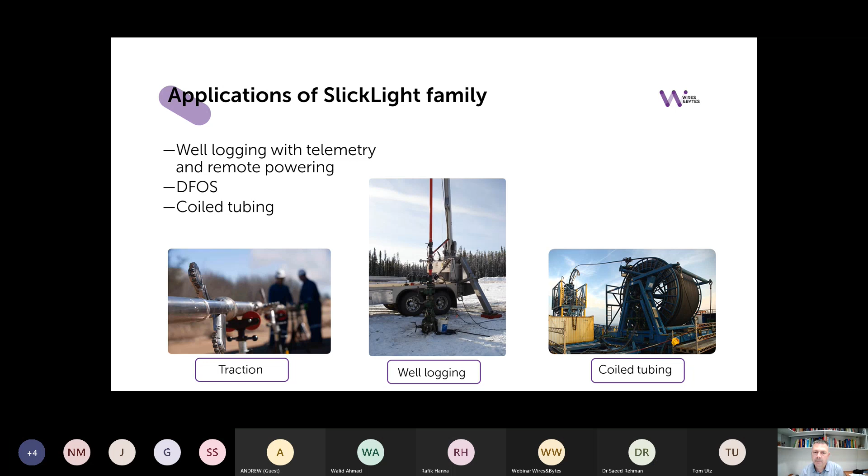What are the expectations of the customer from the slick lines? Actually, it needs to be a very good trade-off between mechanical and electrical features. In other words, it must be strong, it must be small in size, but still it must have very good electrical features. Therefore, it must be a good trade-off between these properties.

Of course, there is a DFOS type which has even more features to be provided in the cable, and that is optical performance. With the combination of DFOS, we have an optical, mechanical, and electrical trade-off, and that's quite a challenge.

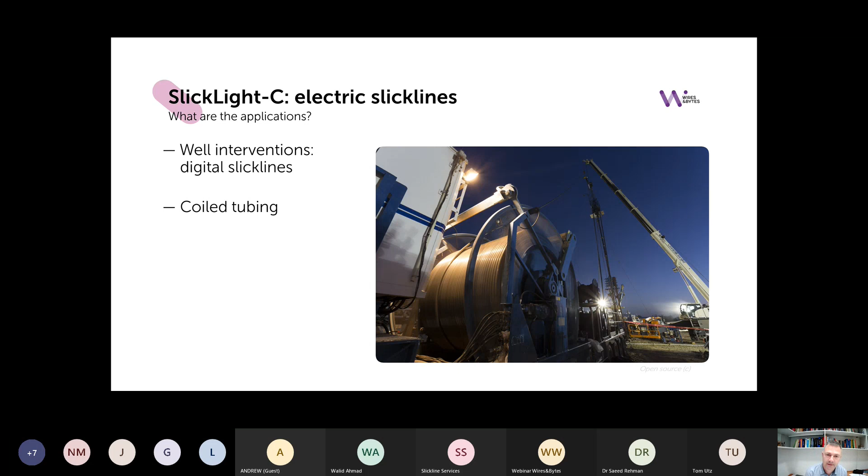Basically, all the SlickLights are strong, flexible, and round. Sizes can go from 3.2 millimeters to 4.8 millimeters. Our objective, or goal, was always to provide good and stable electrical bandwidth in operation, meaning through many well runs up and down, with good bending and twisting properties. We are working hard to lower the resistance in order to provide more power to the tools in such a small size.

Everything with the slick line, especially for the DFOS version, needs to be pressure proofed, so it must sustain 14,000 psi, for example, or even 15,000 psi. So it must be hermetically closed, corrosion resistive, built of corrosion resistive materials. Easy on sealing because you will be mounting the tools and sealing the cables and preventing liquids and gases from penetrating the tools and the cable. And of course, a few customers are already asking for combinations with the DFOS, because they want to evolve from the copper slick lines to DFOS versions.

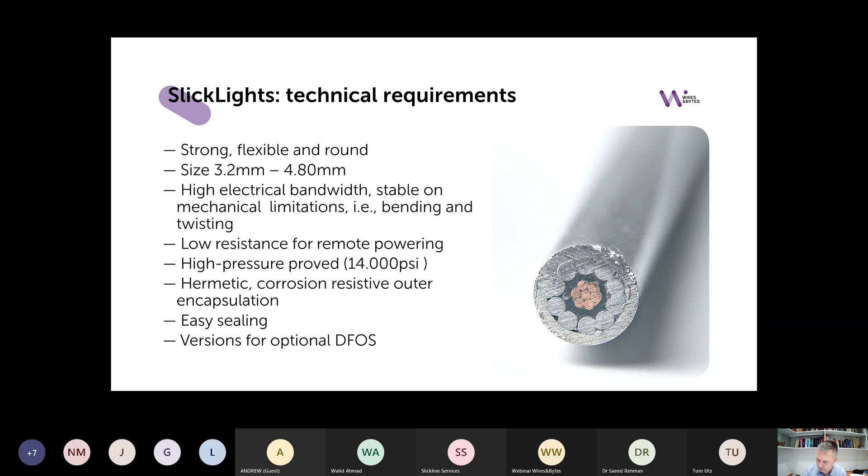This is again capillary tube-based slick lines, and we go actually in two directions with our designs. One is on the left side. It's just a basic version in which we have a copper conductor in the center, insulation, and the outer encapsulation. So the electrical circuit is provided with a central copper conductor and outer encapsulation. That's just the basic version. It's not the strongest, of course. The more advanced version is on the right side, but we can go to very small diameter with this one.

For us, it's simple to produce. Everything sealing-wise is easy, especially now when we are coming with thick wall tubing, using the TIG welding process and not only laser welding, for example. But if you want to go deeper wells and use advanced features like strength, and very soon also advanced electrical properties of the encapsulation, you go with the advanced version, providing more strength. We can do thin layers, multi-layer, or thick layer encapsulation. All of these are possible, with good performance on bending and advanced electrical paths as well.

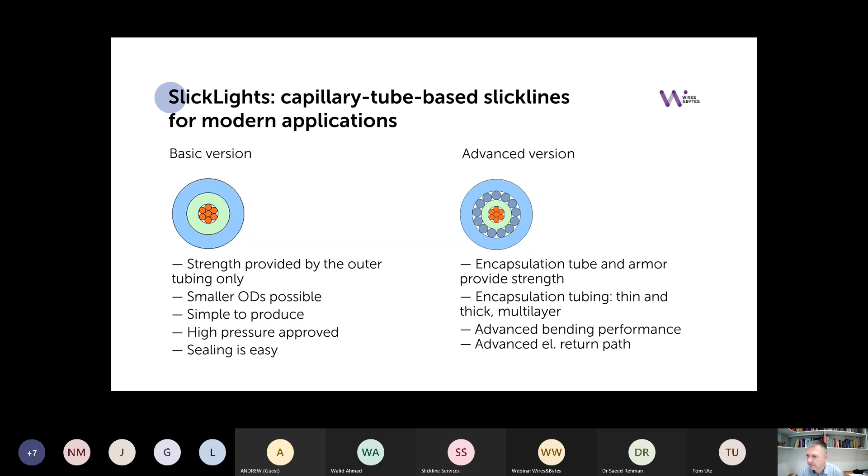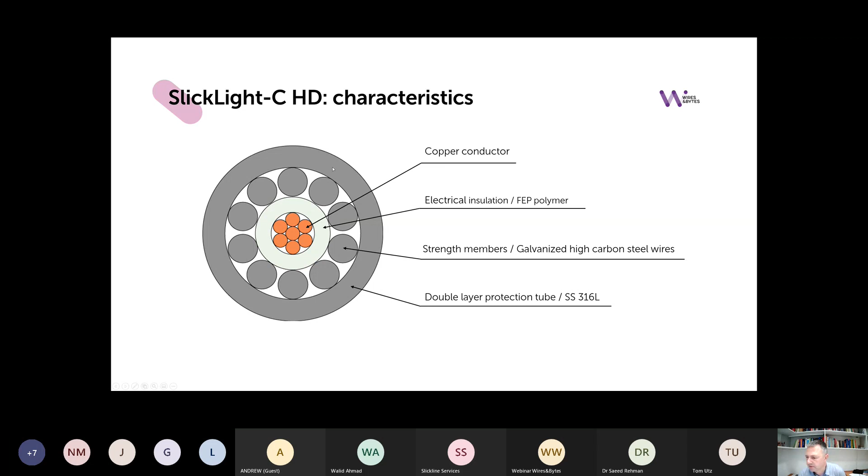We also call the advanced version SlickLight-C HD. HD stands for heavy duty. I'll be giving you some results from the lab on this design, exactly this design which is now on your screen. So we have again the center copper conductor, insulation, the strength members or standing wires, and final encapsulation. And we provide the details - the cable characteristics are always specified in detail in the data sheets which are available.

As you can see, for this design a very important parameter is the rated tensile strength, and it goes up to 15.6 kilonewton, whereas we specify 60% of it as the maximum operating tension - this is a kind of conservative parameter, 9.3 kilonewton. Our estimation, based on calculation, is that the collapse pressure would be 780 bar, but this is only calculation. Actually, it depends on the circularity of the design, and we believe we can go much beyond 1,500 bar in the real experiment, which we haven't done yet.

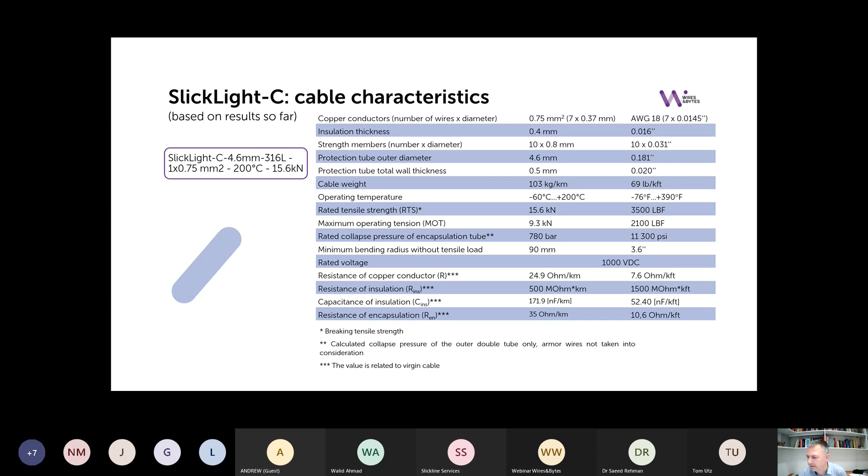And of course, all the electrical parameters you can see here, and we are working very much on these to provide even better electrical performance for future production. The size of this one, which was tested, was 4.6 millimeters with a wall thickness of 0.5. We can soon, very soon, add with the new machine line, even bigger walls - the single layer encapsulation wall will go to 0.8 with the new production line.

So a little bit about the lab measurements and lab activities on our side. We do have mechanical, electrical, and optical equipment in our lab to do all kinds of tests required for the SlickLight. Some of this equipment we developed ourselves, and to our knowledge there is no other equipment of that kind in the world.

In our test facility, we have temperature chambers and strain test benches. We can go to cryo temperatures of minus 200 degrees, all the way up to 300 degrees, in our tests on the cables. On the strain bench, we can go to 50 kilonewtons, and we do the strain evaluation not only with classical strain gauges, but also with fiber optics using very advanced equipment. So we know exactly what is happening with the cables, and also even with the fibers inside the cables. We can characterize all our products in tiny detail.

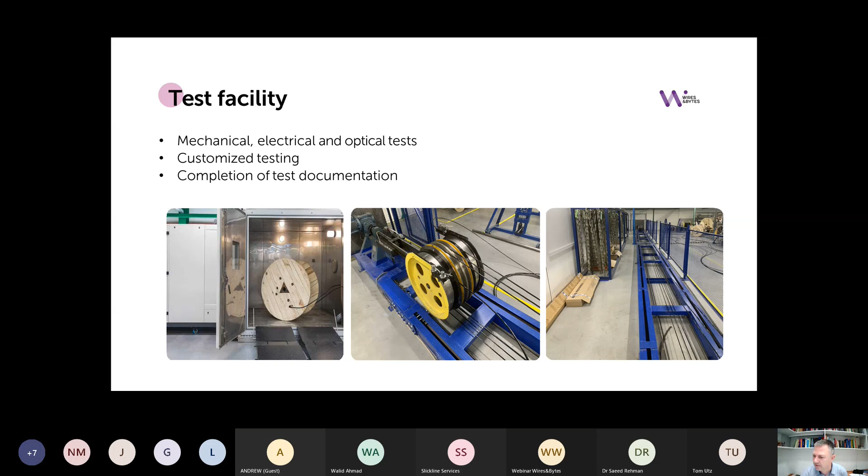Of course, we do much of the customized testing. People ask us to do this, and we provide also the test documentation for such tests. But that's all based on requirement, of course.

And there is this line which was designed actually from scratch - this is a repeatable bending test machine, especially for the slick lines. It's just a machine in which one cable, the slick line, is mounted and fixed on one end, and then it runs through a pair of sheaves.

Or reels, and ends up on the other end, but of course with a tension. It's an automated machine, and then these shafts with the sheaves, it walks left and right, doing constant bending plus minus 180 degrees.

And we use it until the cable starts to fail, actually. So the cable will not fail immediately, but you will notice the moment when the jacket is already damaged, and this is what we register: how many bending cycles the cable can go through with these machines. We use different kinds of sheaves.

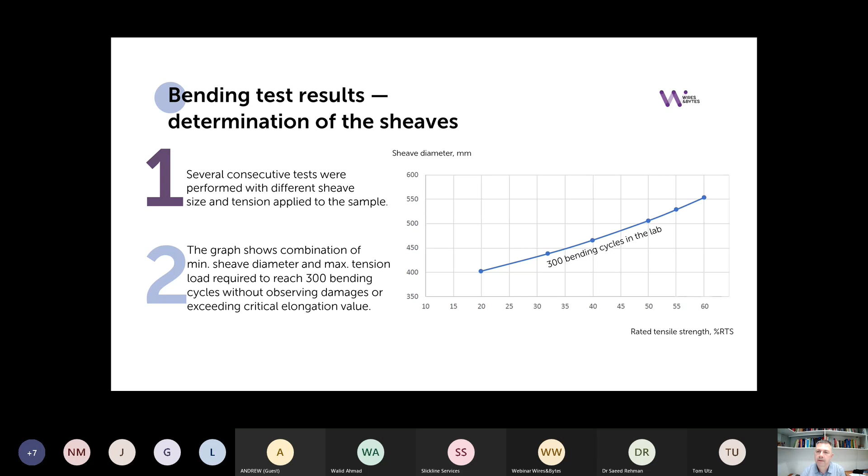On the electrical side, well, the slickline is an electrical line, and an electrical line has some serial resistance, inductance, and also the parallel resistance and parallel capacitance.

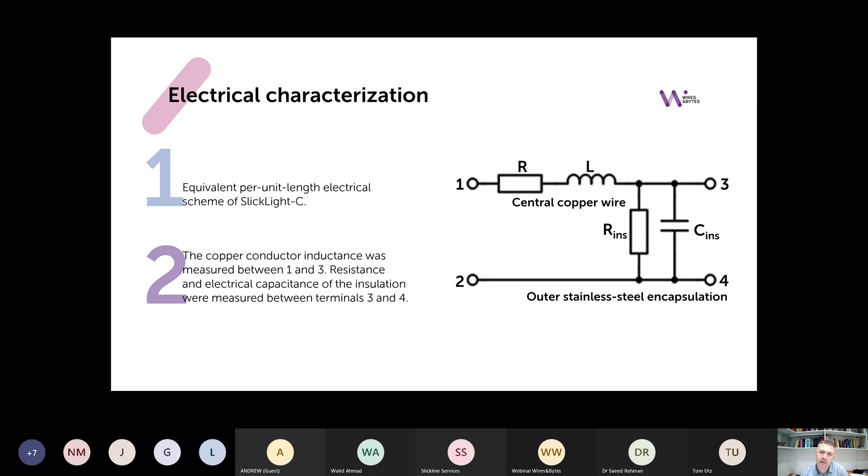So, well, what really matters is the resistance, serial and parallel, and this capacitance, whereas the inductance plays a role only at very high frequencies. So it's dominated by resistance and capacitance, and this is the focus of our activities in providing you good parameters on the electrical side, so you can go to higher bandwidth and you can deliver more power to the far end and the tools there.

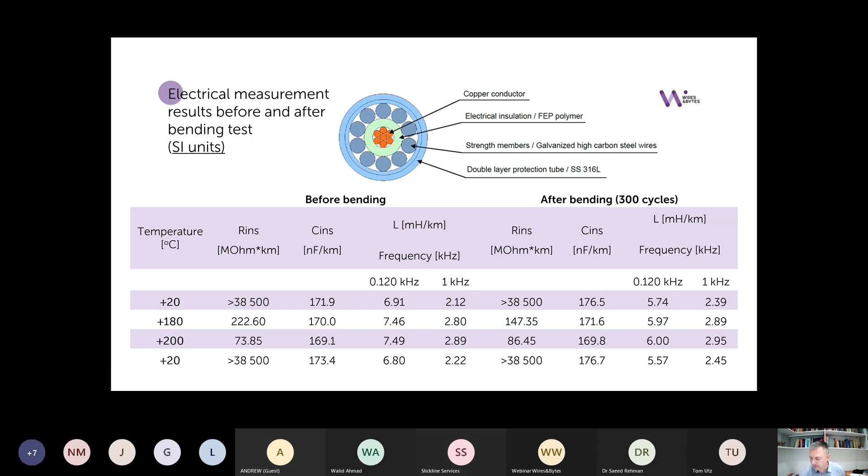For this particular design which we are discussing, everything is already in the data sheet, so we provide all this information directly from our lab. We measure them before the bending and even after the bending, after 300 cycles, to see the changes there. It's all available, and we have it available in SI units and also in imperial units in the next slide, for example. So everybody can work with this data.

Of course, you can see here, we test everything even on different temperature ranges. It makes sense to go to 200 degrees. We haven't received requests for more than 200 degrees yet. Who knows for the future? But there's a lot of things that can be done and measured in the lab.

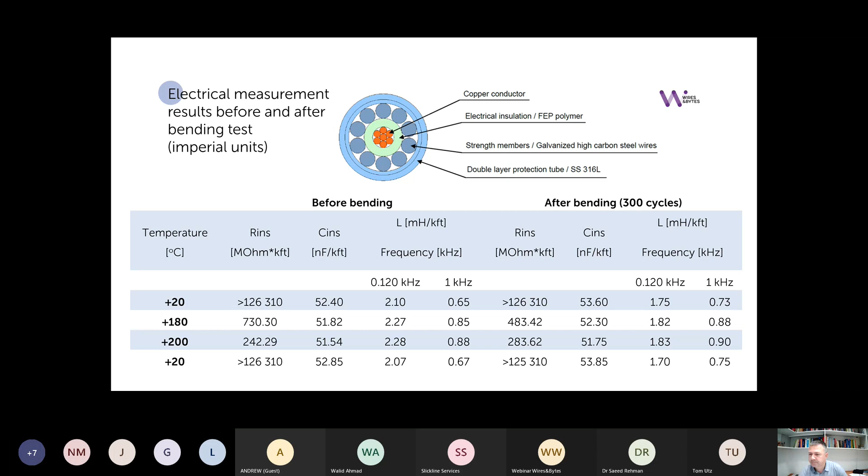And now a little bit about the production facility. So there are two production facilities. We have one in Perm, the main one, and the other in the US, in Arlington, Texas.

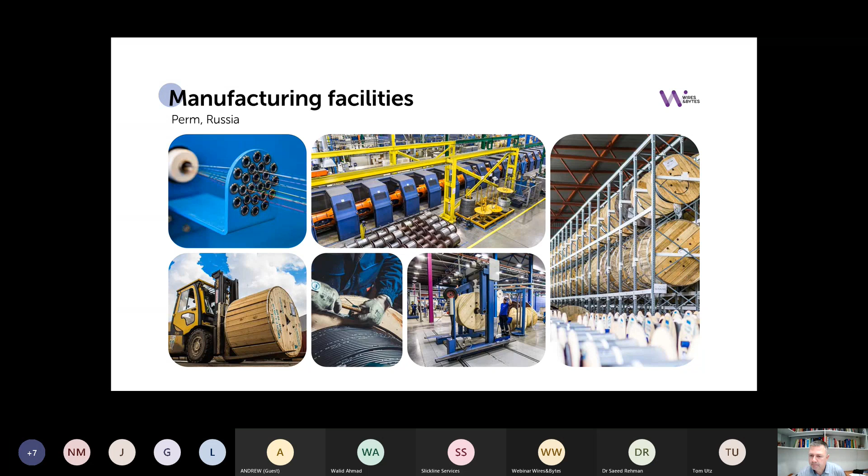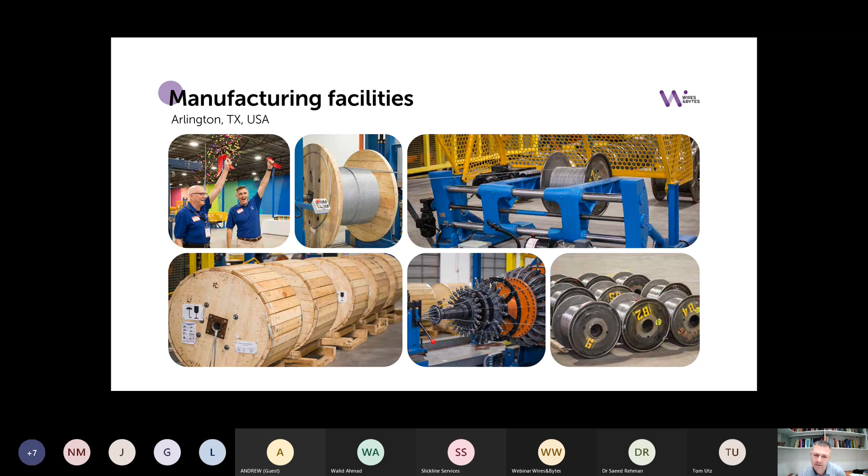Slicklines are built in Perm, in the Russian facility, which is a new facility - a little bit more than 10 years old. And the other, yes, this is the Arlington manufacturing facility, focused on a different application and different industry, power industry.

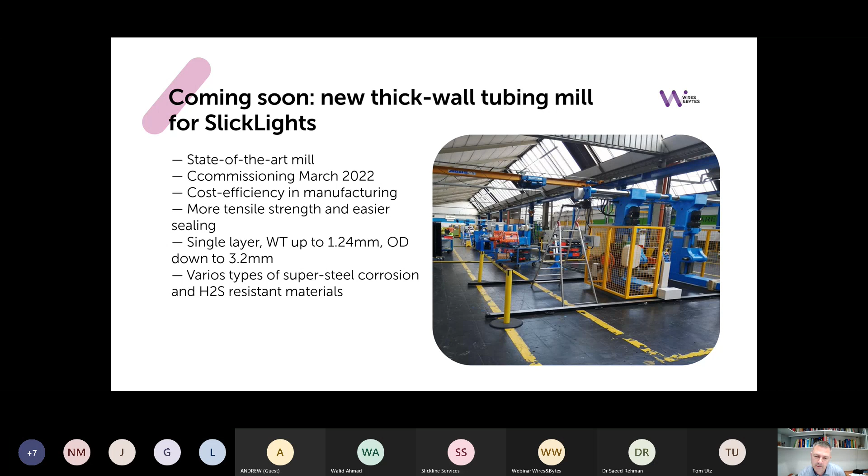And we are adding in our facility in Perm a thick wall tubing mill. Already we have first productions, and now we are increasing the lengths, producible lengths. So we'll be going up to, with wall thicknesses of 1.24 millimeters, and with the OD down to 3.2 millimeters there. We'll be doing all kinds of steels, including super steel or super alloys there, to provide all kinds of H2S resistant materials.

Actually, we have a good case study already in the US, but I will leave that one to Tom to present to you, the through tubing solutions project in US. So Tom, please take the lead.

There's several large, fairly old oil producing fields that they are going to be targeting as their first area to service. They need to still run some regular tools, currently memory tools, but they now will be able to run those tools continuously, as well as use the fiber elements to detect any issues in the wellbore itself.

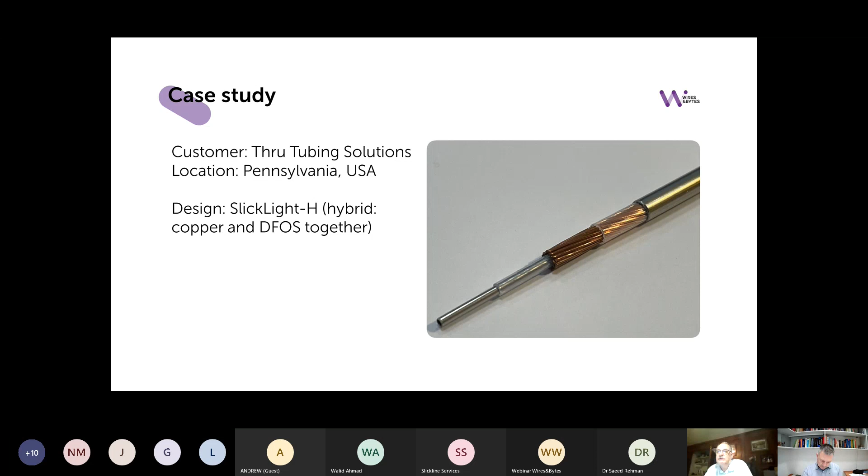Next slide, please. So this is a few pictures. The cable was installed by an installation company, and Thru Tubing is a company that has both SlickLine and E-line services. At the moment, all of their SlickLine units were busy with jobs, so they chose to put the SlickLight on a regular E-line truck.

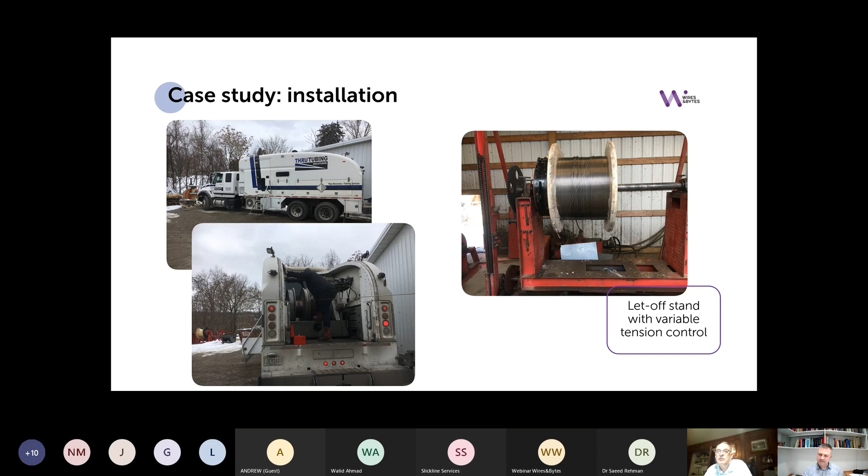That's no big deal, really, except it's a little bit harder to set it up. But once you get it set up, and the next slide will show the bottom end that connects to the fiber optic package on the inside of the reel, there's not a lot of room to work there, but the engineers were able to sort that out, and it works just fine.

The installation went well. It was put on the narrow side of the split drum, and there were no issues whatsoever. It went on with a double brake. Spooled very nicely. The diameter was laser monitored, and it was 191 plus or minus 5/1000ths of an inch. So extremely good diameter.

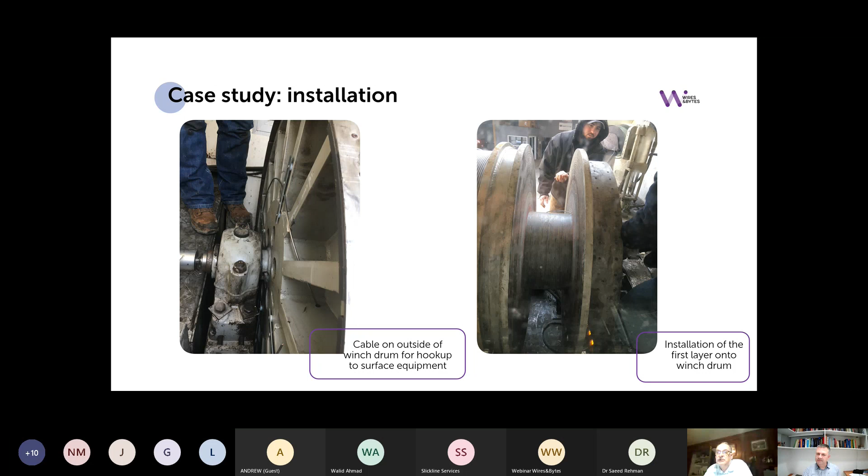Next slide, please. So to make a conclusion before we ask the question and answer session, SlickLight-C is actually a family of carefully designed products. It's all manufactured actually under one roof, and the purpose of these cables are, of course, well intervention, well logging, remote powering, and also injection into the coil tubing.

We try to organize the best trade-off between the mechanical, electrical, and also optical features for the SlickLight family. But still, we will be providing our standard product, but we can also customize to meet special requirements in the application.

And actually, Wires and Bytes is exactly about that, providing good products and also best possible post-sale support, and even helping customer in definition and design and application of all those electrical and DFOS slicklines, and that's the purpose of Wires and Bytes. Thank you for listening to this presentation, and we can now have a question and answer session.